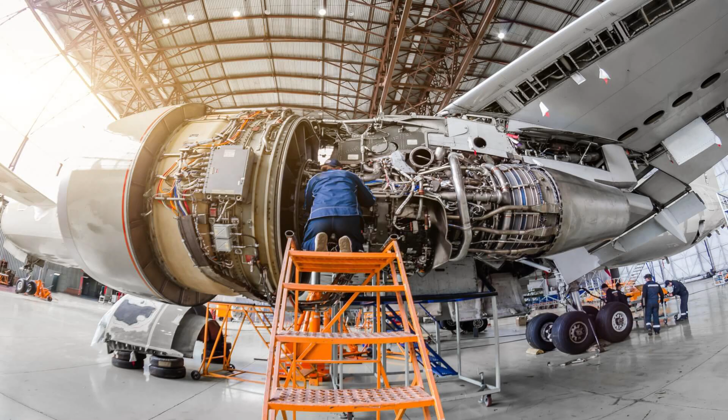Well, the first thing that I would like to show is the table of contents for today. So we have 6 topics, and the first one is, why is maintenance important? Okay, let's start with this question. This is a valid question in aeronautics. There are not many accidents in aeronautics, hopefully, and we could think that maintenance is a very well-established field because of this, that there is nothing more to investigate. But is it so?

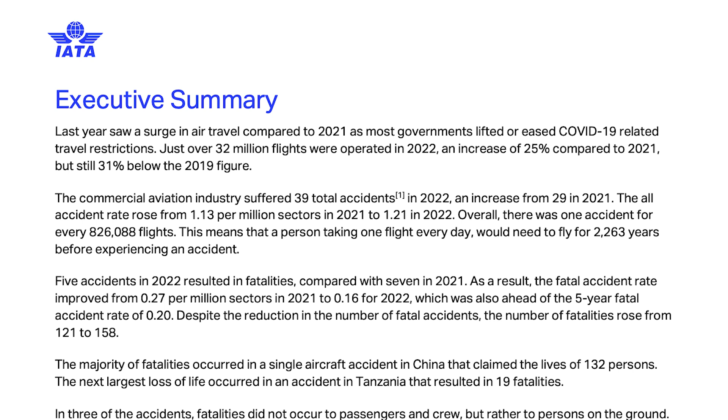According to IATA's report of 2022, the results are quite different. The IATA is the International Air Transport Association. Okay, so let's see what the report says. In 2022, we had 39 total accidents in commercial aviation, compared to the 29 accidents in 2021. And the number of accidents per flight is also low.

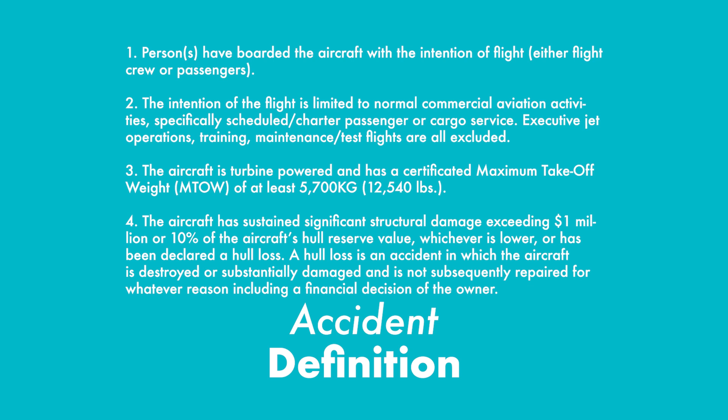What is an accident in IATA's terms? Well, these are criteria here that should all be met to be considered an accident. And we have here the reasons, the causes of most accidents, starting with weather condition, aircraft malfunction, and others. If we look at the 4 reasons that I'm selecting here in black, we can see that maintenance is actually responsible for a huge percentage of accidents, actually.

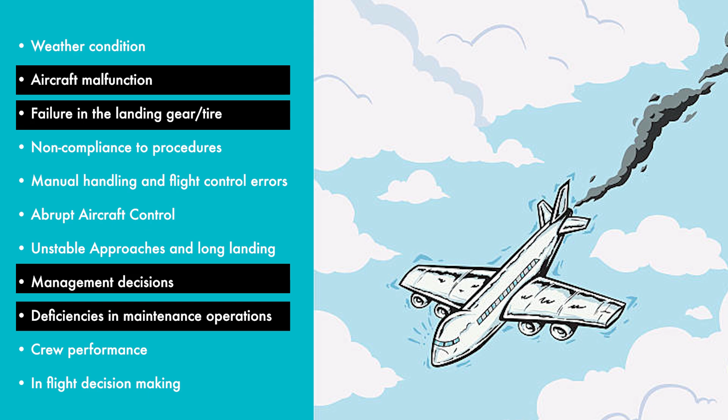The thing is, maintenance is very related to safety. And to ensure safety, we need to guarantee a proper maintenance of our aircraft. Maintenance is vital for safety, and every single accident that we can prevent is worth trying.

The economical value of maintenance is also of relevance and important. Every year the numbers change, but it's about 10% to 15% the contribution of maintenance to the total costs. It is relevant. It's not a very big number, but it's relevant considering that the airline profit margins are very small. And remember that we are talking about millions here. So it's still relevant and still significant.

Another thing that might convince you of the importance of maintenance is customer service. When you are a passenger and you're waiting for an airplane, if you encounter a situation such as a delay or an airplane on the ground event, it is very disturbing for you. This is another reason why maintenance is important. Some companies for these situations find extra aircraft, but the problem here, as you can guess, is that there are extra costs involved in this.

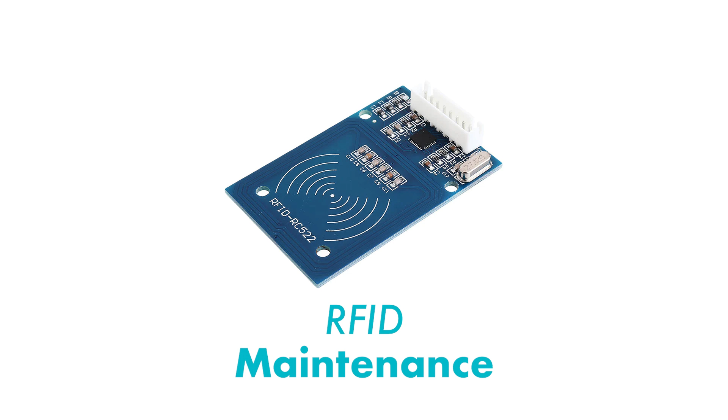Now let us see 3 lessons about maintenance. There are several myths or misconceptions about maintenance, about what happens in maintenance. And one of these is the lack of awareness about how digital and how advanced in terms of technology the world of maintenance is. If you think it's an old school field, you'd be surprised in reality by looking at how we are using RFIDs, drones, robots, and advanced algorithms such as neural networks and artificial intelligence to make maintenance work in the best possible shape for aeronautics.

So let us debunk 3 myths related to this. The first one relates to things failing. Some people think that things cannot fail. That's not totally true. Malfunction, catastrophic malfunction rarely occurs. That's true, but there are what we call incidents. Okay, not accidents per se, but incidents, which are small situations that impact safety.

One such incident was reported in this news by SKYbrary, and the news details a smoke incident due to the engine bleed system failure. Okay? Unfortunately, this was not an isolated event. There were 500 incidents reported for the A320 in the same year as this. And so that you have a notion, even engines, which are critical systems, can go through unscheduled maintenance interventions. So this highlights the need for continuous monitoring and proper maintenance at all times.

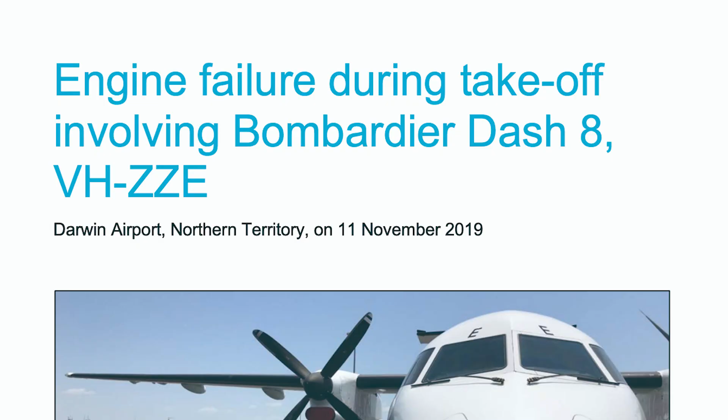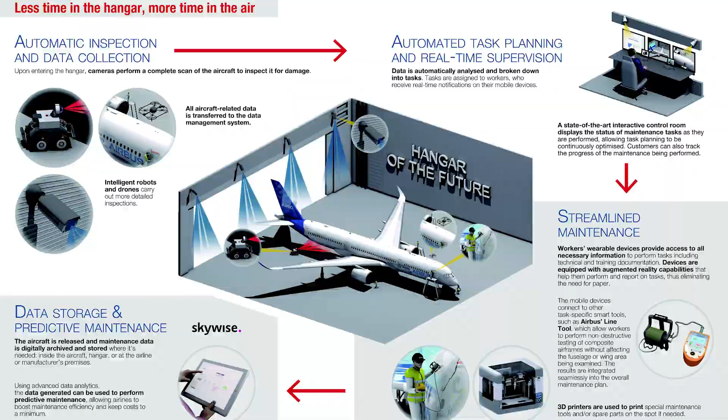The second myth is that we do not do cutting-edge technology in maintenance, that we still stick to old technology, old formulas, old things. This is not true, and I want to talk about a specific case, which is the Airbus Hangar of the Future. Airbus created the Hangar of the Future project with the aim to revolutionize, to give new ideas to the sector of maintenance.

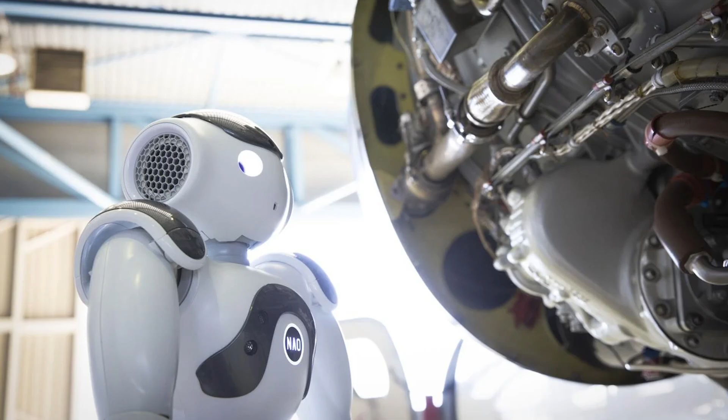And it's basically a laboratory where you apply lean management techniques and other techniques of relevance, such as robots, drones, virtual reality, artificial intelligence, and so on. And the good thing is that this project has a real-world application and a real-world impact. Okay, this is just an example of how we actually do cutting-edge technology in maintenance.

The third myth has to do with failure. You may think that failure is a simple phenomenon that is very easy to figure out when something is broken or it's about to break, but it's not so easy. The failure is a complex phenomenon and it takes time to understand it. And you have to always monitor several signals to figure out if something bad is going to happen. So it's complex, it's difficult, it takes time, but it's indeed possible.

An example that I like to give is that of a doctor who has real-time information about the health status of its patients, and the doctor with this information can diagnose and prevent diseases and do it ahead of time.

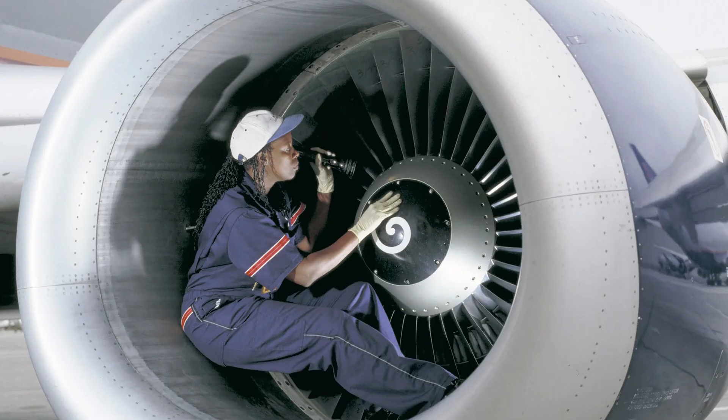It is something that we take for granted, but in reality it's astonishing how aircraft can fly for decades and stay in service for decades. And maintenance is greatly responsible for this. If we did not have maintenance, most likely we wouldn't have the same performance. Even though predictive maintenance is gaining traction in the field, we must not forget that greatly responsible for having great performance is scheduled maintenance. So we will see here the alphabet of aircraft maintenance.

A concept that I would like to talk about is hard time events. These are checkpoints that represent rigid limits on which the scheduled maintenance must occur. They can be expressed in calendar time, so hours. Hours it's a bit too much, but maybe months, years, and so on, or in usage time. Okay, so cycle time, number of flights or missions that the aircraft has done. And so you can imagine a clock ticking or a flight counter spinning, it depends. And once it reaches the value, the maintenance hard time checks have to happen.

So aircraft is a hard time component because it has hard time events that we call checks. The aircraft goes through checks, okay? It has four major checks, A, B, C, D. And you can see that the A and the B checks are light checks, and the C and D are heavy checks, and the intermediate layover is an intermediate check between the C and the D check. So let's see each of these checks in detail.

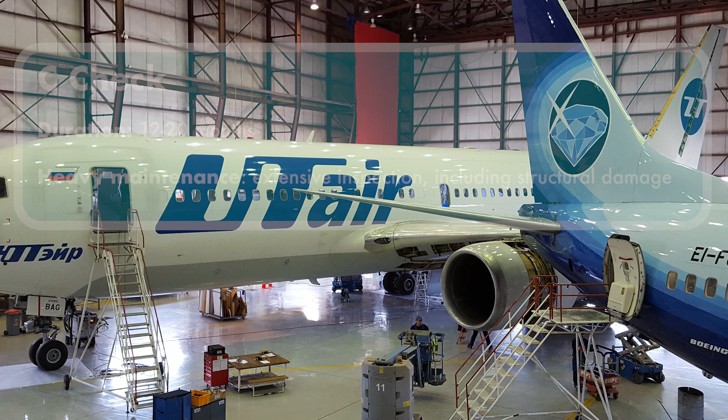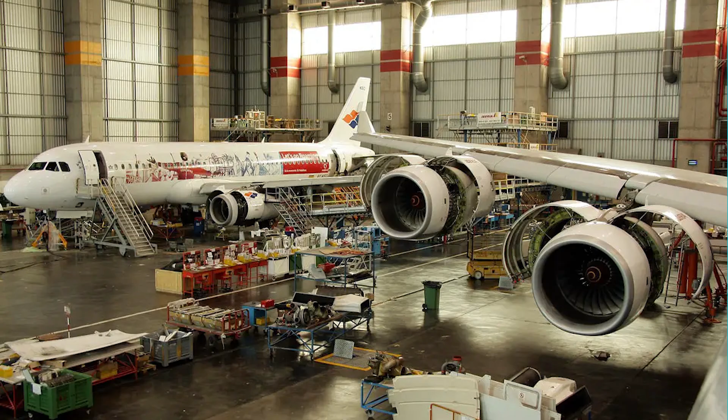Finally, we have the C check, in which we are entering heavy maintenance. It occurs every 12 to 20 months, so it doesn't occur as frequently as the A check, and it is extensive. It involves an extensive inspection of the aircraft, including a little bit of structural damage inspection. Tasks that are involved are, for example, system checks, cleaning, and servicing.

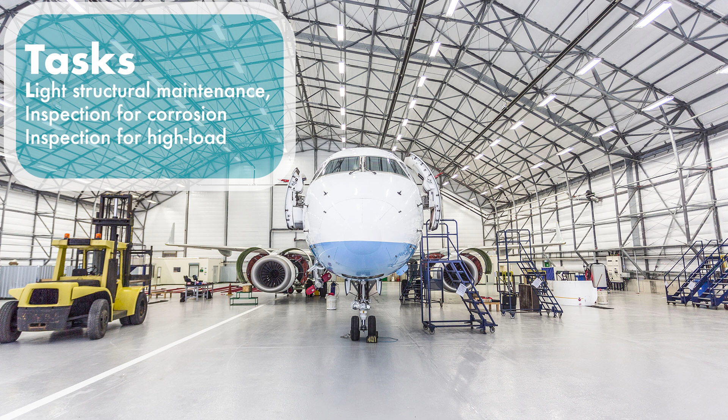The intermediate layover is a check between the C and the D. Some airlines do not consider this check, but others do. What it does is light structural maintenance. So it doesn't do the heavy structural maintenance of the D check, but it's a bit more than the C check. Okay? And the tasks involved are inspections, checks for corrosion, high-load parts are inspected, and other tasks are also done in this type of check.

Finally comes the last check, which is the D check. This is the heaviest and most comprehensive maintenance intervention on an aircraft. It happens every 6 to 12 years. It lasts several weeks, and several things happen during this check, such as the paint is stripped and the outer panels are removed, all of this mainly for doing a better structural inspection, because this is the moment when a very major structural inspection happens, more than even in the C check or the intermediate layover. Okay? Importantly, the internal components are also checked and serviced.

And you can see this as a training camp for the plane. Every inch is scrutinized, and the goal is to make the plane more resilient.

Let us now talk about the topic of overhaul of an engine. First of all, what is an overhaul? Well, the concept is more or less straightforward, and it's usually related with words such as to fix, to improve, to modernize, to rebuild, to reorganize, and to re-examine. The idea is that you tear down your system according to the manufacturing specifications, and you make it go to tip-top shape again.

But there's a difference between repair and overhaul. A repair is to fix something that was considered broken or malfunctioning. It's what we call a targeted action for a specific system or component. In turn, an overhaul is a more extensive action that involves sub-actions and goes beyond repair. It includes, for example, the disassembly, the cleaning, the repairing, and the reassembling of the system.

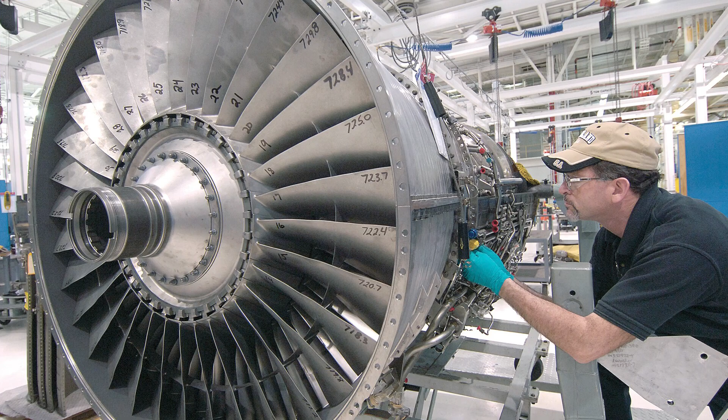The idea is that you receive the system, you make an overhaul, and you bring it into a good as new condition with optimal performance. We know that this does not always happen. We do not always have optimal performance, but the idea is to get as close as possible to that. We can adopt the following definition shown here that was agreed between FAA and EASA for overhaul.

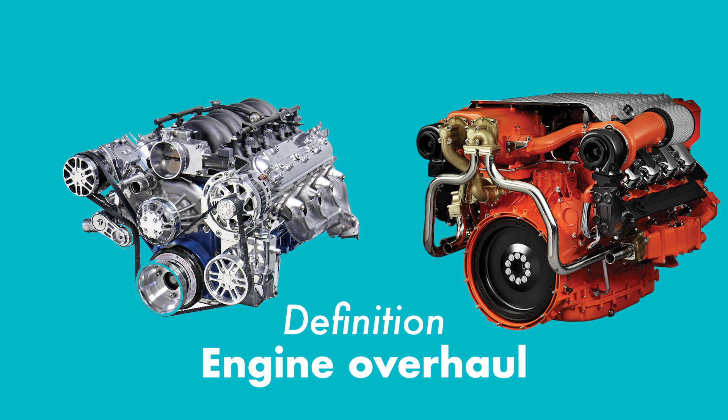We are talking about overhaul, and this is a very common thing that we're going to talk about in these classes. But beyond aviation, overhaul can also be applied to car engines and also to marine engines. On the KLM website, you can find a specification in 5 steps for an engine overhaul. They explain how they do the engine overhaul in 5 steps.

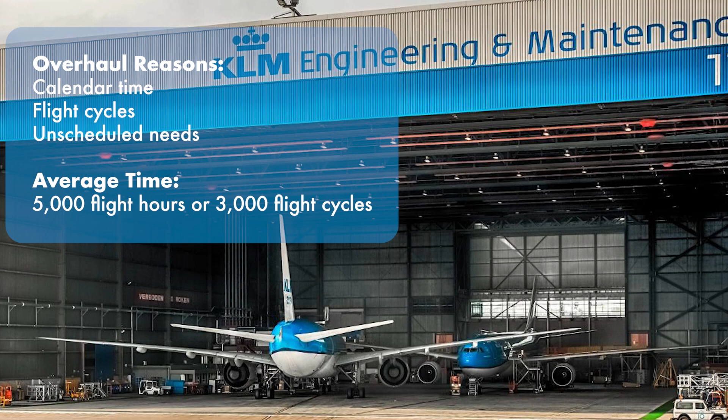The first step starts when the engine arrives at the maintenance facilities of KLM. This can happen due to the calendar time or due to the usage time, like in the case of the aircraft. So every 5,000 flight hours or 3,000 flight cycles, around these values, they say, the engine is overhauled. But to do so, you also need to make sure that you have the work scope in place, which is basically just a to-do list of the things that you need to do when the engine is overhauled.

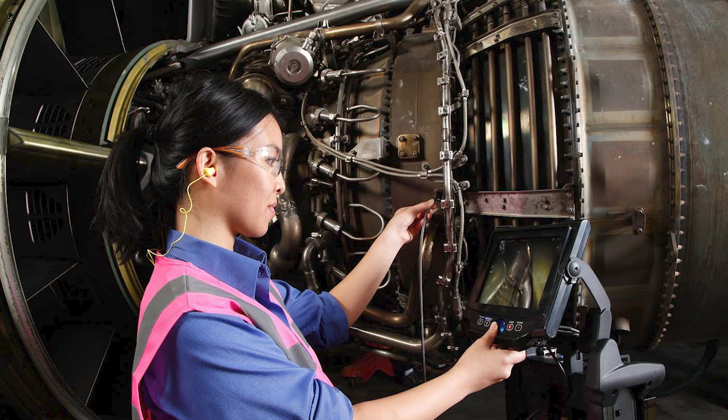Now let us see step 2. Step 2 involves the washing of the engine. This means that the engine goes through several baths using different liquids so that you can scrub the dirt and the dust away in the best possible manner. After this, the engine is ready for a visual inspection, either using cameras or manual inspection.

Step 3 involves the disassembly of the engine. So we have this complex puzzle of around 40,000 pieces, because the engine is a very complex and intricate machine.

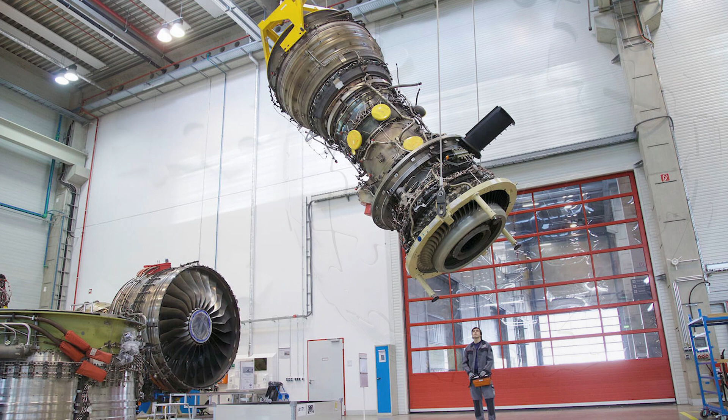And we have to break it into pieces to tear it down. After that, you will send the pieces either to KLM repair shops or to a supplier that is responsible for taking care of the system. Step 4 is the repair and the replacement of the parts that have problems. And finally, step 5 is to put the puzzle pieces back together.

So after you reassemble the system, you can test it. You can send it to the test cell where it undergoes rigorous testing. And after that, there is a team of inspectors that will issue a certificate of airworthiness if everything runs okay.

Are you curious to know who are the stakeholders of aircraft maintenance? Well, let's talk about it. There are several organizations involved in aircraft maintenance, and we will talk about their roles and contributions, starting with airlines. Airlines, also called operators, are perhaps the central organizations in aviation because they own and operate aircraft. So they are like the clients of the industry.

But we also have military customers, and they have special needs because every flight is a distinct mission subject to different degradations. So the maintenance is also different for these clients. We also have the original equipment manufacturers, which build aircraft for end users, which in this case are the airlines. There is a considerable number of airlines operating at a global scale.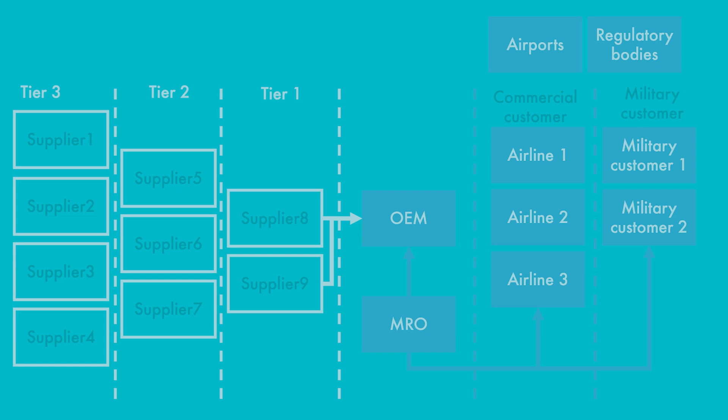An example of an OEM is Embraer in Brazil, which builds commercial but also executive jets. So finally, the suppliers are organized into the shape of a pyramid. They are organized into tiers, and tier 1 supplies the OEM, while tier 2 supplies tier 1, and so forth.

The maintenance, repair and overhaul are specialized companies, and basically what they give is maintenance services to the different stakeholders. They can be either independent service providers or be part of an airline or a manufacturer. Talking about regulators, they are responsible for establishing but also imposing the law, making sure that everyone is accountable for their actions in the aviation industry.

There are several regulators, such as the Federal Aviation Administration, or the European Aviation Safety Agency, or even the International Civil Aviation Organization, which operates on a global level. And finally, we have the airports, which help perform line maintenance. And this is for us the last of the organizations that we will review. We now will talk about failure and maintenance and how to define them.

Finally, let's talk about some concepts. The first concept is performance requirements, which is basically to say that you need a criterion for a certain functionality. So if you have a function, to say whether that function is respected or not, you need to set a criterion. So basically, a list of performance requirements is just a functionality checklist, to see if everything is running according to what you have defined.

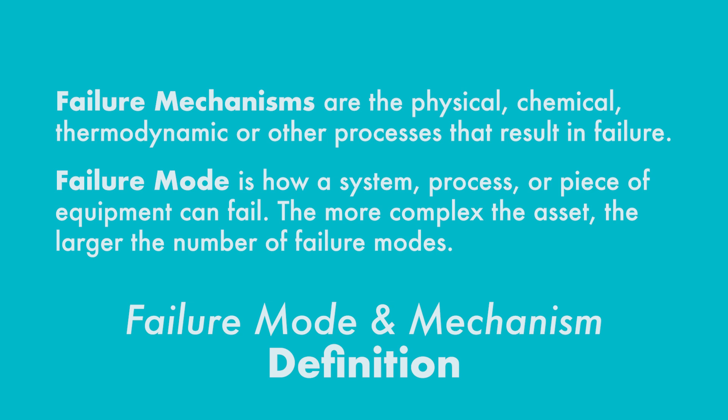By the end of this lesson, you should be able to list, define, and distinguish fundamental concepts of maintenance. And I wish you safe travels and blue skies ahead.